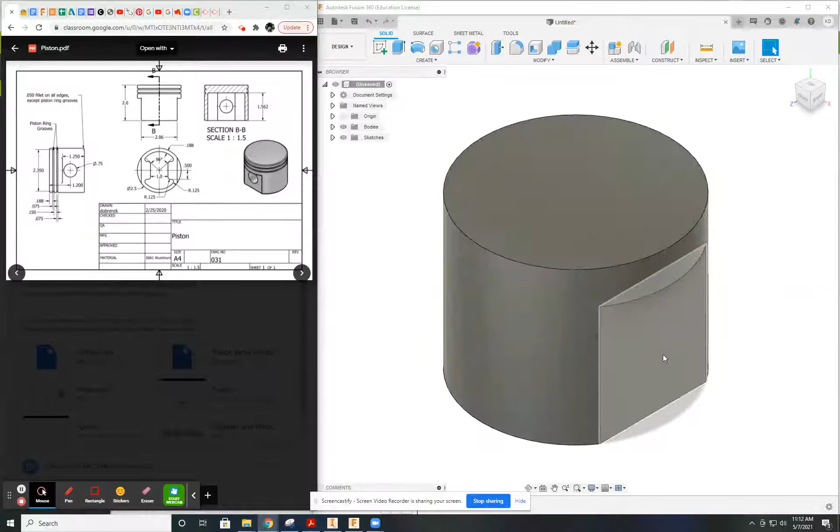This is the second video to model the piston for our motion machine. As you can see here, I started with a slug and did my extrude cut. All this information is indicated in this view on the drawing here. So now I have to cut the wrist pin hole and cut the grooves for the piston rings, and then do a generous fillet on everything.

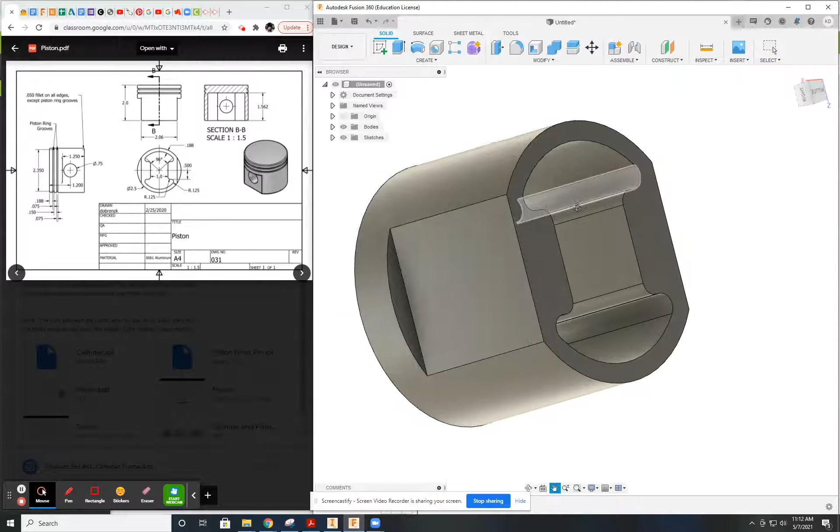Okay, so let's cut the piston wrist pin. That's going to happen on this nice flat face right here. Let's see, so the diameter of this hole, which is going to be a nice circle, is going to be 0.75 inches, also known as 3/4.

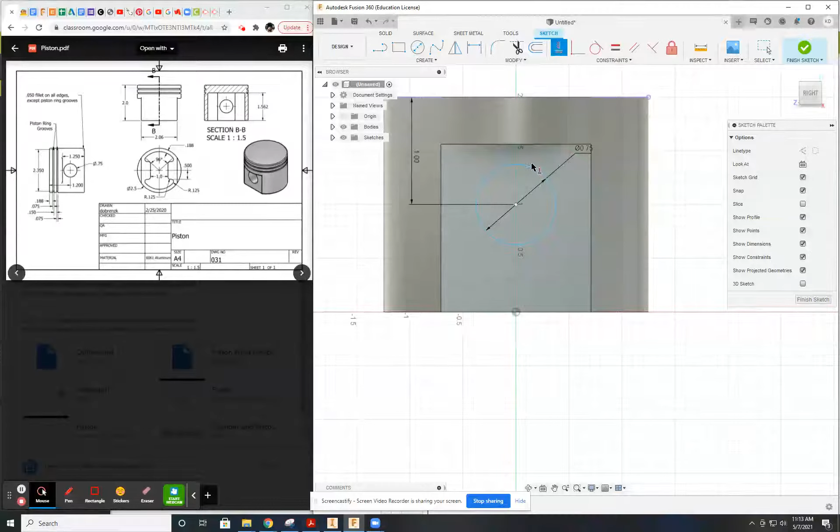That is going to be 1 inch from the top to the center point. Now I need my left to right. That looks to me like it's perfectly in the middle. Since I'm not given any information, that is the assumption. So that is going to be, let's see if I have a midpoint. Well, my midpoint's actually the origin, so I can just do a nice vertical constraint right over the top of that to get my fully constrained feature.

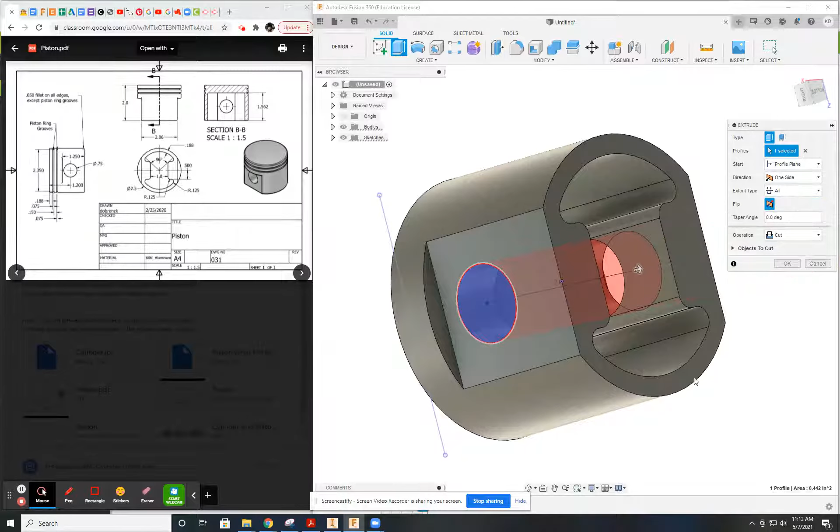We know what to do once we get to our extrude. We go to cut, send this guy all the way through the other side. Oh, cut a little too much. We just want to select the circle. I can do a distance or through all, makes no difference at this point. Through all is a little bit cleaner, I would say.

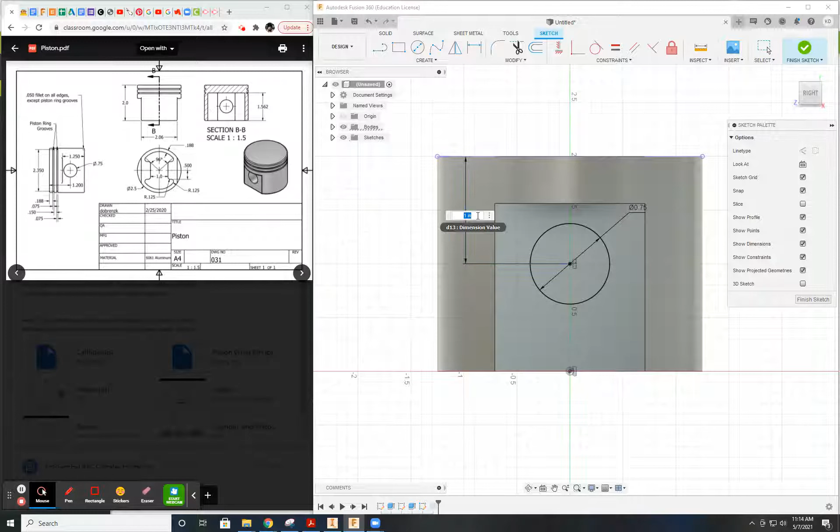Oh excuse me, it's 1.2 inches, so I'm off just a little bit. I'm looking at it here and it looks too far up the piston, so it was off by a shade, so I need to bring that down just a little bit. Easy thing to do, I can just go to my sketch and change that to 1.2, thus the beauty of drafting on computers.

Now, let's see what we're going to do now. Oh, there's actually two different heights here. So this outside cut area here is actually not as tall, or not as deep, as this section here.

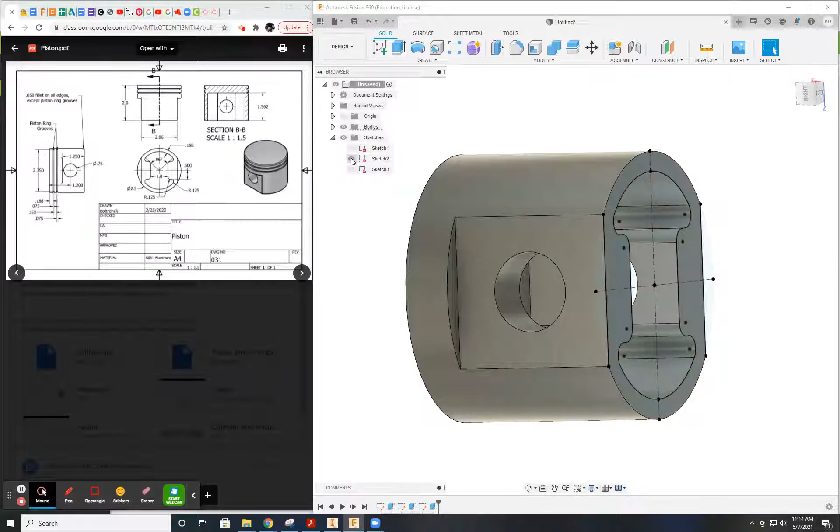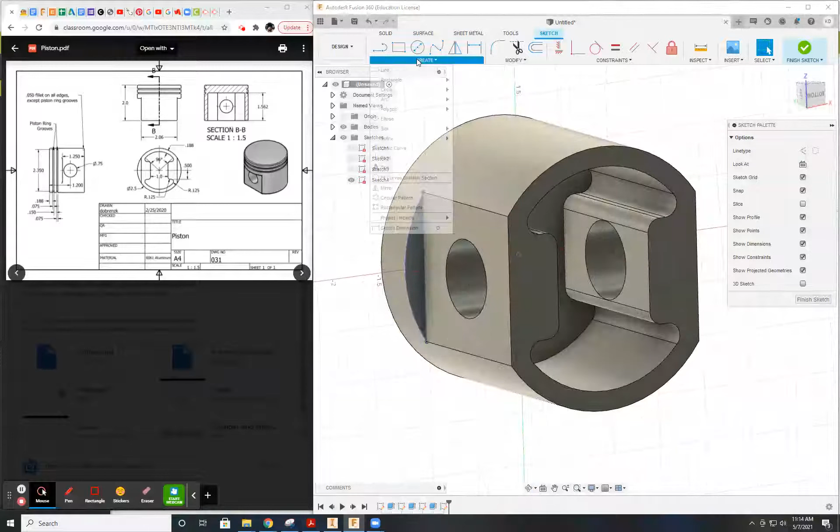So I actually need to change that. That's really quick and easy to do. So here's what I'm going to do. I'm going to show sketch 2. Actually, I'll just create a new sketch. I'm going to sketch on this face. And what I'm going to do is project, include this section and this section. Okay, and then I'm going to just extrude join that.

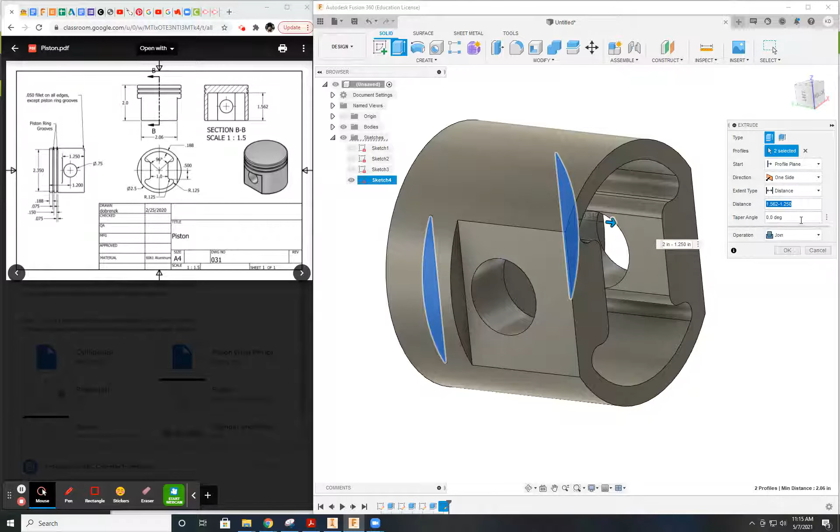And so what's my distance on that? Well, it is 1.562 minus 1.250. So this is the depth of the interior, which is what I did on my initial cut, and this is the depth from the bottom for this section. So I'm essentially saying this minus this is how much further it should be up. Let's see if the computer can figure that out. And it did.

All right, easy fix right there. That's the name of the game, easy fixes. All right, so now I need to put in my piston grooves. There's probably a lot of different operations we could use to do this. One that comes to mind is a revolve, right?

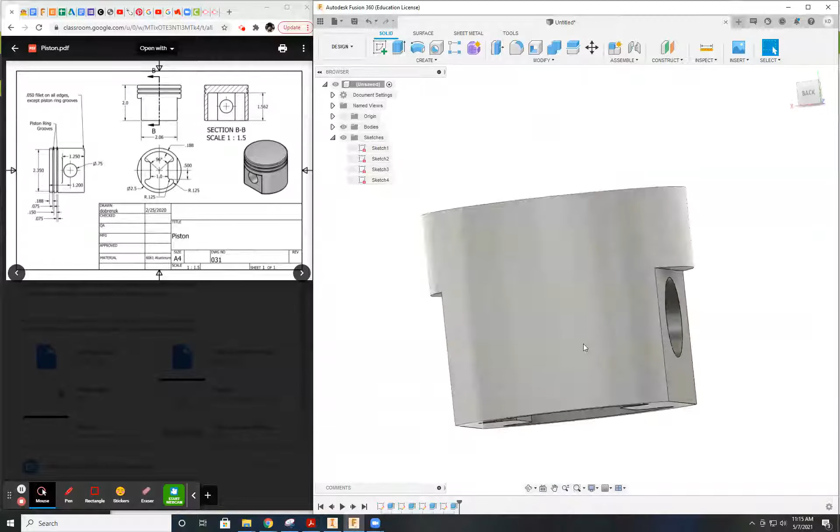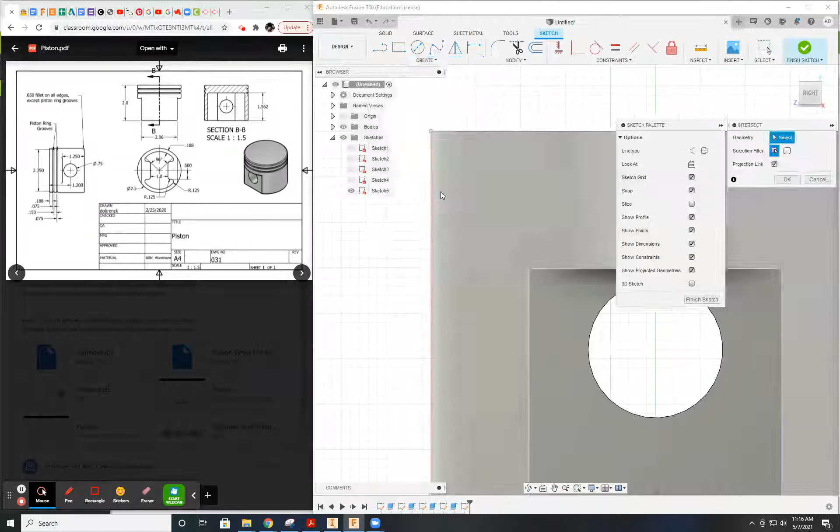Revolves are really good for circular things. But I need to start a sketch, so which sketch is going to cut this guy in half? I could use either one of these two guys. I'm going to use this one. Okay, and now I essentially need to draw in these profiles. So first, let's include my shape. Actually, I want intersect because I only want to know where it passes through that plane that I have selected.

Let's see, I'm going to do... there's 2 rings, so I need 2 boxes. And these are square cut. Now I just need to know my distances. Well, let's zoom in.

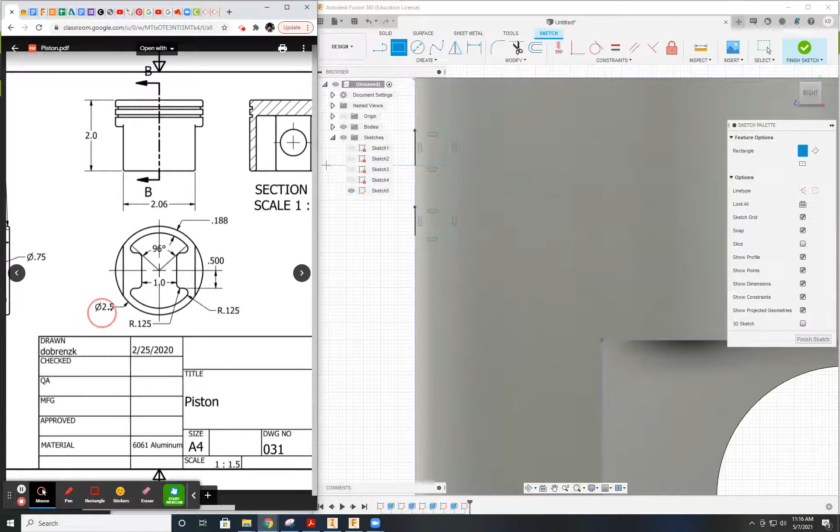To help you out, I'm going to orient it the same way here. So let's see, from the front face to the first cut is 0.188, or 3/16 of an inch. The width of this is 0.075. Both of these are 0.075 with a 150 gap in between.

That sounds easy enough, 0.075. I misspoke. And then between these two guys, we have 150 thou. Here to here, we have 150 thou, 0.150, and then this guy is also 0.075.

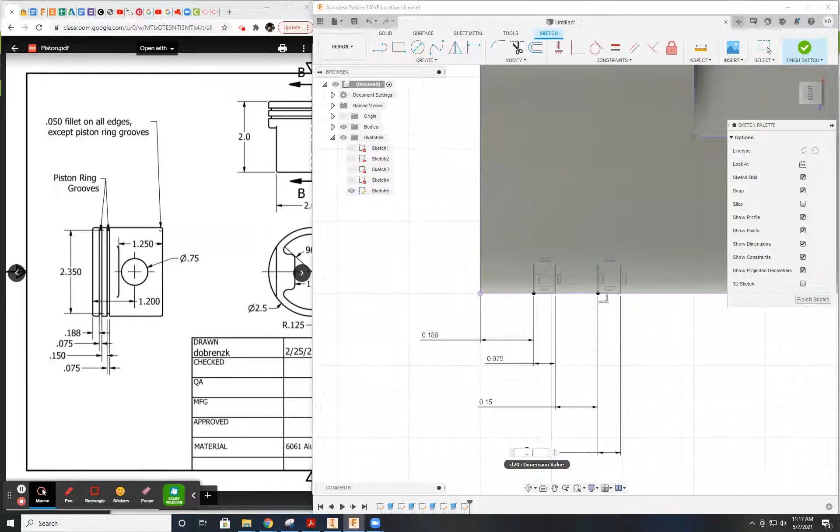All right, now I need to know essentially the height or depth of these. And what is the height or depth? Let's see. Oop, too far.

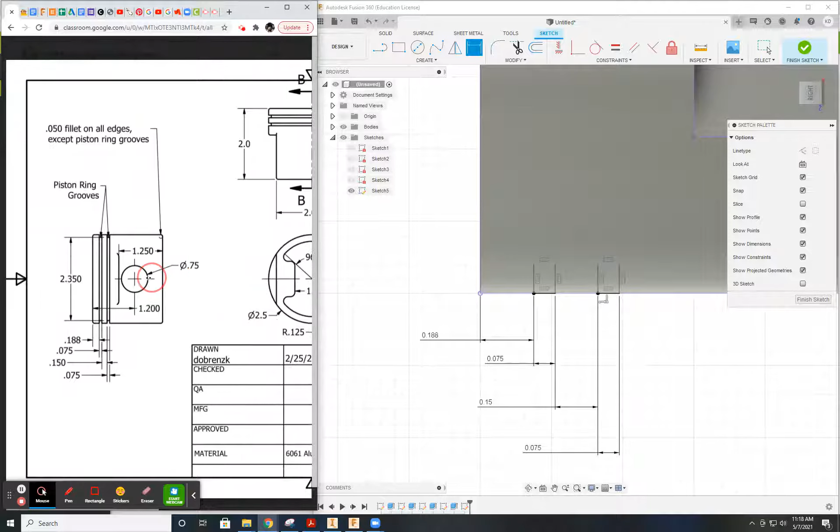Well, it's actually not specified here, so I'm going to guess that these are square since it's not given, but that should be given. That's where you would send it back to the engineers and say, what's the depth of these grooves? Let's go with 0.075. They look squarish, where that's going to work for now, but that is information that you do need going forward. Maybe somebody will update these documents before you try it.

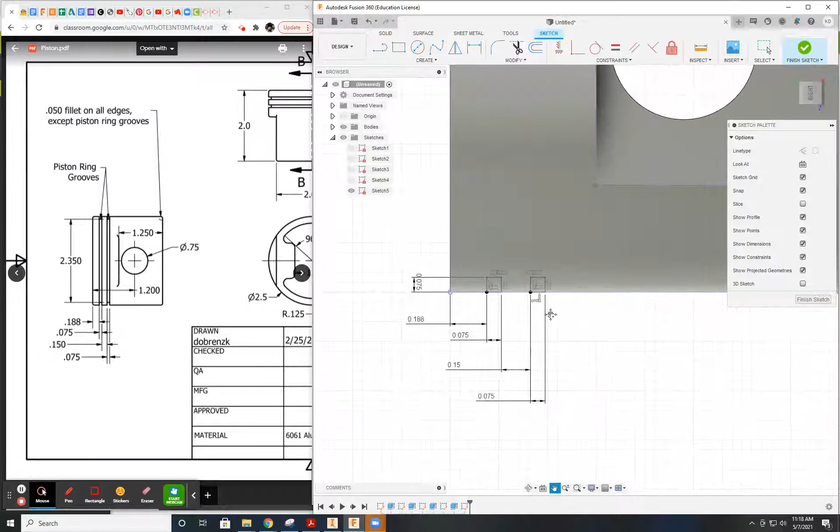Okay, so I have that. Go ahead and finish that sketch. And now what I'm going to do is I'm going to go to the tool that I was talking about, which is not extrude, excuse me. Let's go to... wait for the computer to catch up.

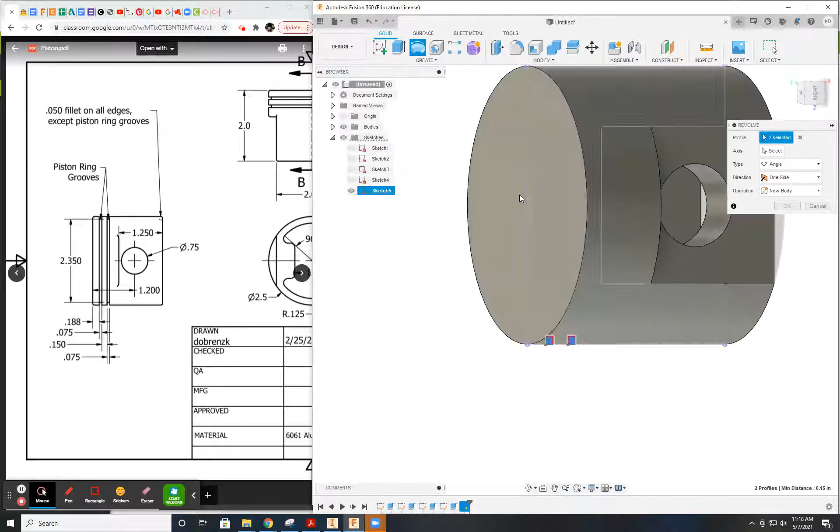Let's revolve here. So I'm going to revolve these two sections, and my center point is actually going to be my origin, so we just got to find that guy. And actually they give you these nice axes too. So let's see, which axis do I want? Oh, gotta select axis first. So there we go. So it's revolving around this axis, and it's those grooves that I already indicated.

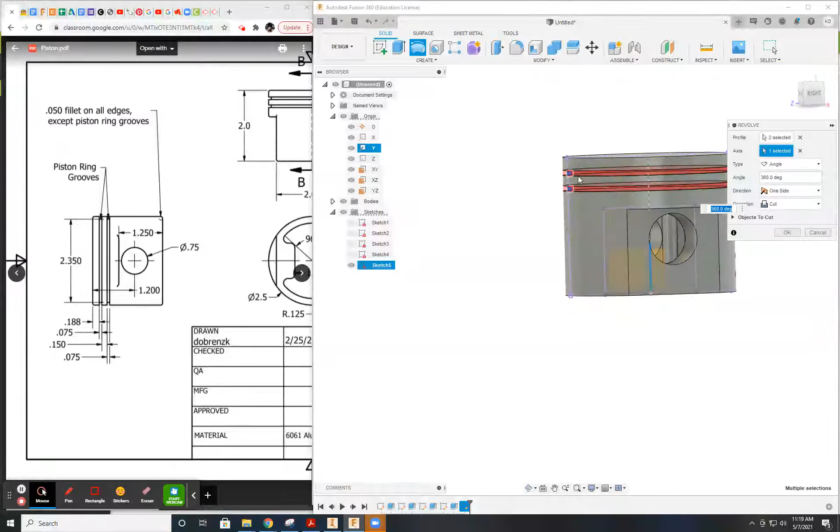So let's cut it. All right, that actually looks pretty darn good.

Now the last thing we need to do is do a fillet on everything. So sharp corners and high stress of an engine do not work well together. So fillets help everything smooth over to reduce the chances of things cracking in the future.

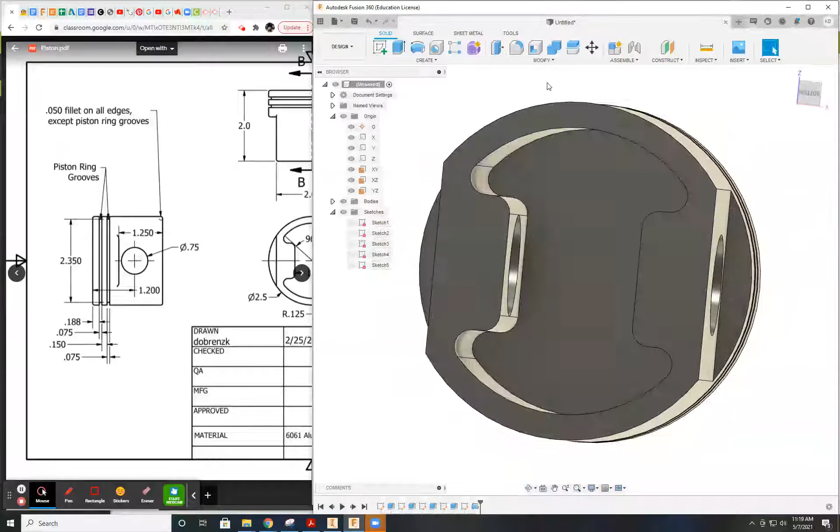So if we go under modify, grab our fillet tool, we want to fillet all these corners. Even these guys would probably get a chamfer in the real world, a pretty small one. But let's just fillet everything.

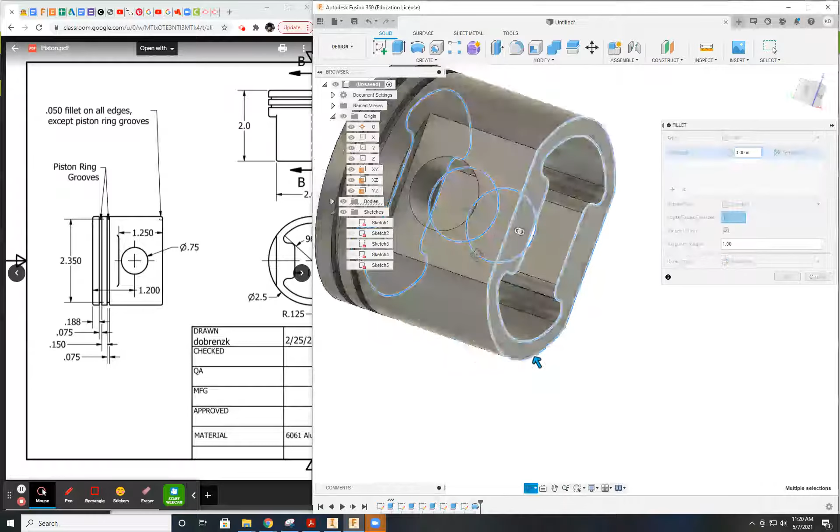Let's see if the computer can handle it. And by everything, I mean everything other than the grooves, because that's what it says here. Okay, got all the top, the interior, and definitely the very top, because that's not a groove.

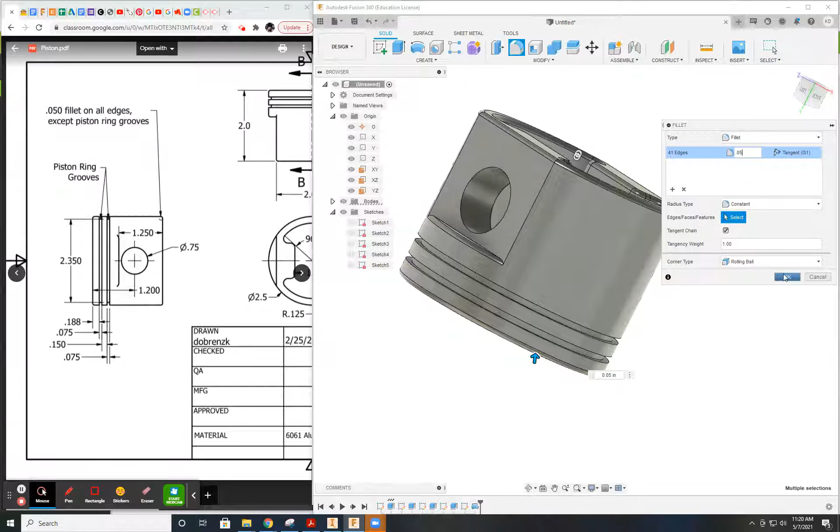All right, let's put in the fillet of 0.05. Hit OK, and ooh, look how smooth that guy is. Very nice.

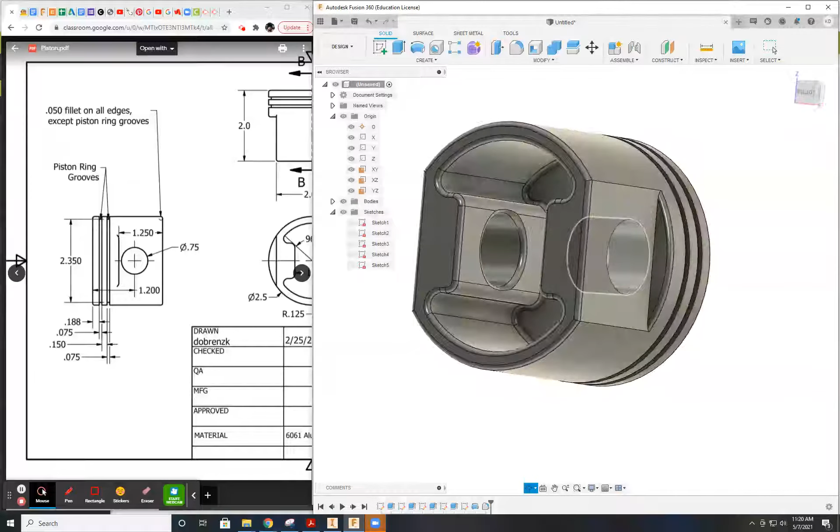Probably would go back and undo these. That's too much of a fillet. Probably you're losing surface area on the piston, but you just do what it indicates on the drawing. If it doesn't indicate, then probably don't do it.

And that's easy enough to fix. Come back in here and unselect these edges. Or if you can't unselect, you might just have to start over, but it's an easy enough thing to fix.

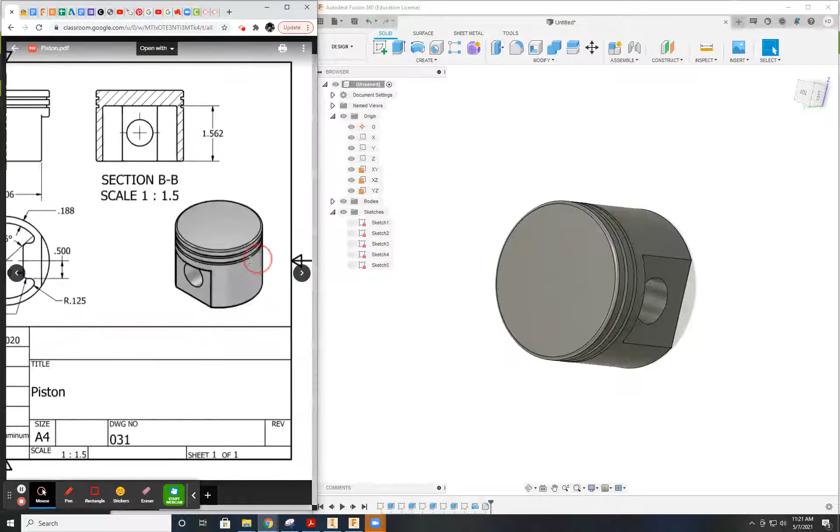All right, kind of come back, and it's always good to double check everything. Let's go back, and does this look like my drawing? That's usually the first test. Does my drawing look just like this? If the answer is yes, then that's a pretty good indication you did what you were supposed to do.

So if you are here, nice work. Learned a little bit. Used some different tools like symmetry.